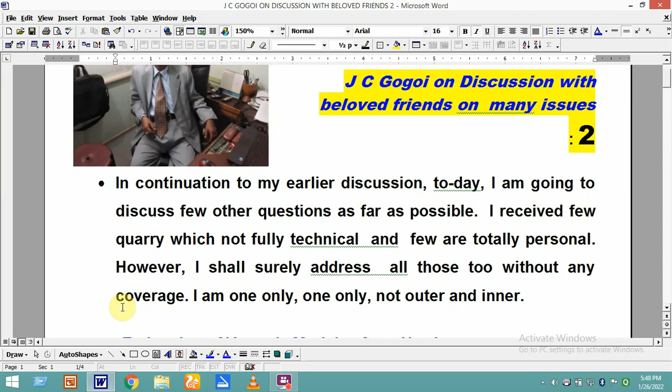Today, I want to discuss a few questions from my beloved friends. As far as possible, there are a lot of questions. I will simply reply to a few, and I shall try to address all these questions in coming days. Today I shall discuss one of my friends' questions.

He wants to know how to calculate the Young's modulus from N value. His basic problem is the formation is cohesionless soil, the granular soil, where N value, it is very difficult to collect undisturbed soil, so N value is often the only alternative for us.

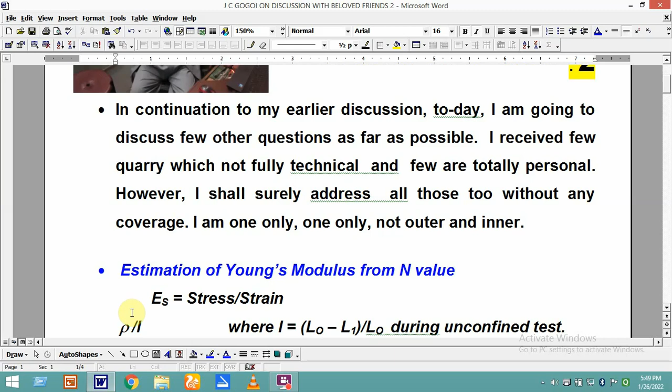We know Hooke's law: stress per strain is elastic modulus or Young's modulus. In cohesive soil, we can conduct unconfined compression test, triaxial shear test, and from there we can calculate stress and strain. Stress we can calculate from other tests also, but strain we can calculate very correctly and efficiently only from the unconfined compression test.

This is because the strain varies with the confinement of lateral pressure, that is sigma 3, where sigma 1 equals sigma 2. Some say sigma 1 and sigma 2 are the vertical stress and sigma 3 is the lateral stress. This vertical stress, sigma 1, equals sigma 2, meaning action equals opposite reaction.

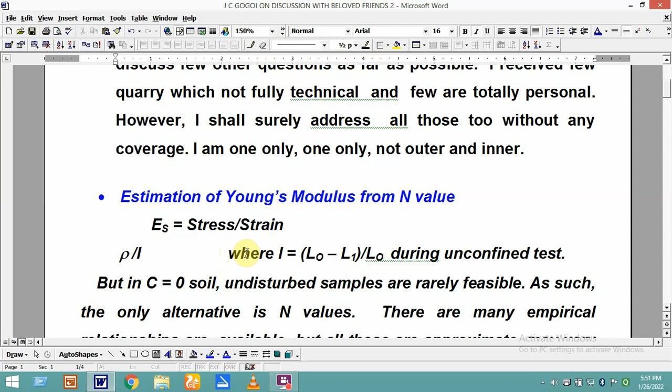So from this relationship we can calculate our stress and strain relationship. But where there are no undisturbed samples available...

...in case, very cautiously, if anyone collects one undisturbed sample from sand formation using a triple tube barrel, bottom discharge triple tube barrel, which is a too costly affair, yet there are least possibilities of conducting other shear tests from that core because it is friable in nature. Sand is friable in nature.

There are a lot of empirical relationships developed from N value also. With density also there are empirical relationships from N value, but the most popular correlation is between Young's modulus and N value, which is most commonly used.

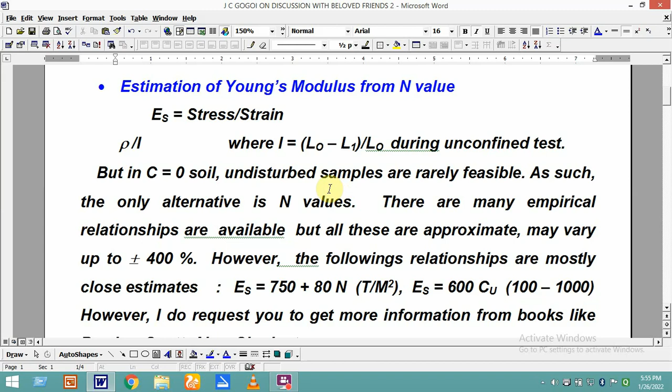In this regard, these are all empirical relationships. Some have found it, so they stated it in books or technical papers, journals. However, I sincerely request all of you to go through books like Bowles, Scott, Alam Singh, etc. We should not forget that most of these empirical relationships are based on research from developed countries, especially American countries, so their soil and our soil have some difference.

For instance, in India, one-size grain sand is available only in Madras. Otherwise, in Madras, 1mm means exactly 1mm, there will be no 1.1. It is naturally occurring sand, so it is called standard sand, Madras standard sand. For such reasons, I suggest going for more confirmation and more information from books, so that your estimation cannot be misled.

Another one of my beloved friends asked about the relationship between N value and SBC. In my earlier lecture, I had already discussed that N value is the origin of the SBC analyzing method.

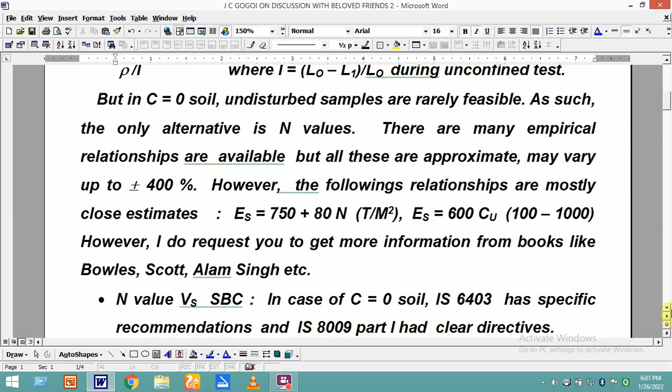We know granular soil has no cohesion because adhesive force is zero, only frictional force, so we can calculate frictional force from the N-value itself. This was recommended not only by the code but long back by Raymond and Terzaghi also. After presenting his split spoon sampler, Raymond conducted and demonstrated SBC from N-value and blows, and our IS 8009 Part 1 had clear guidelines on how to calculate SBC and settlement.

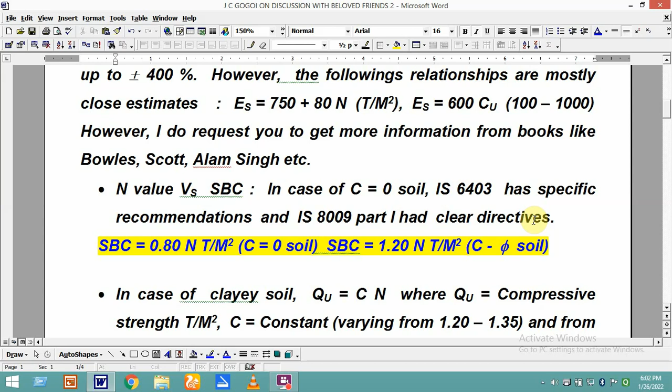In earlier days, Peck, Hansen, Thornburn and Terzaghi considered for sandy soil 0.8N in SBC tons per meter square. In case of clay, it's 1.2N tons per meter square, for both C and phi clay. So from this N-value we can calculate the frictional angle phi directly, and from there the cohesion component will be zero. Next, combining the weight and surcharge components, we can calculate the SBC.

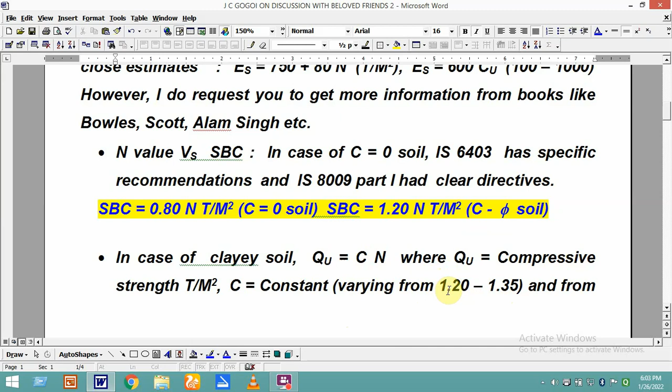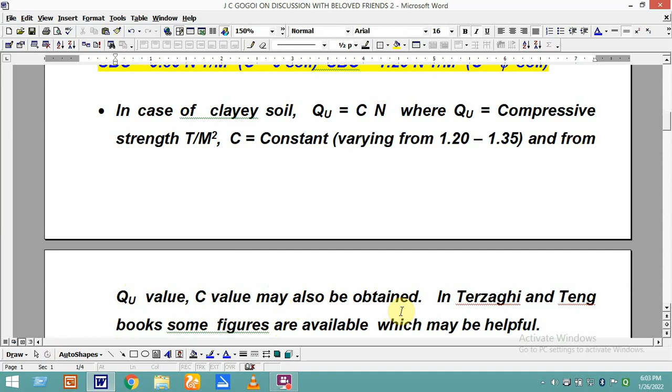In case of clay soil, normally we calculate the unconfined compressive strength from N-value, which is C times N, where C is a constant varying from 1.2 to 1.35. Earlier it was considered 1.2, now it is 1.2 to 1.35. From this compressive strength value, we can also calculate the C value, because there is an accepted theory: Q equals 2C times tan of 45 plus phi by 2.

During our shear test, this is the failure plane, and this angle is considered as beta, which equals 45 plus phi by 2. From that criteria we can calculate C also, considering phi value from 5 to 10 depending upon the liquid limit and plastic limit.

In such cases we have to calculate the C value considering phi as 5, and another C value considering phi as 10, or any value, but it should not be more than 10. We should go for SBC analysis for C and phi, for phi equal to 5 degrees against some known C, and for phi equal to 10 degrees against the corresponding C value.

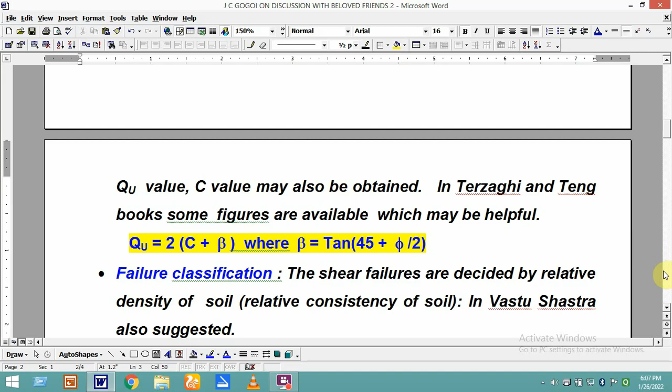this soil mechanics means relative density of the soil, color, relative density and permeability of soil. With these three aspects, they focused on construction activities. Relative density means less the void, the soil is relatively more dense. Less the permeability, the soil will be relatively more dense.

So in the line of Vastu Shastra's instructions, our modern scientists, Terzaghi and others, also calculated two methods, all based on relative density. One method is void index: if void index is less than 0.55, then general shear failure, and if it is greater than 0.75, then local shear failure.

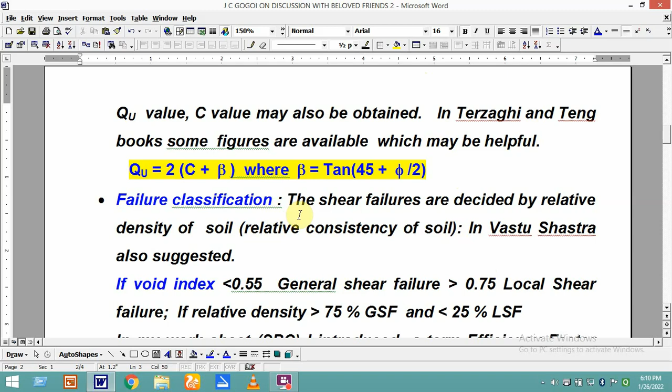In relative density terms, if it is greater than 75%, then general shear failure, and if relative density is less than 0.25, then it is local shear failure. This is clear: only relative density is the deciding criteria of the failure classification, whether general shear failure or local shear failure. General shear failure means 100%, local shear failure means 66.7%.

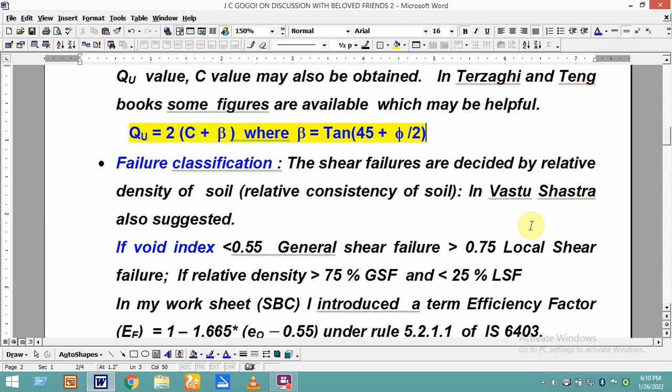So in between, that will be intermediate. In all my worksheets, I introduced a term called efficiency factor, calculated from void index. Efficiency factor EF equals 1 minus 1.665 times, within bracket, E0 minus 0.55, under rule 5.2.1.1 of IS 6403.

In terms of relative density, efficiency equals 1 minus 0.666 times, within bracket, 0.75 minus relative density by 100. That means it is not in percentage.

In this equation, you may be having one question where I am getting 1.665 and 0.666. You may be raising this question. I will explain the basic difference between general shear failure and local shear failure. General shear failure means 1, local shear failure means 0.667.

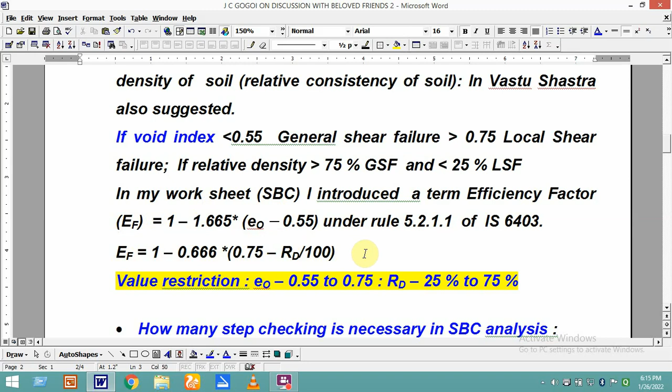I hope this will surely help you in calculation. You can use this equation directly, there is no problem. I do not have any copyright or anything else, you can use this equation directly.

Another question, perhaps from a professional engineer: how many steps of checking are necessary in the SBC analysis?

SBC means the safe bearing capacity. Our design load shall be safe against shear failure and excessive settlement failure.

The limitations of settlement for different types of structures are given, right from tall structures, steel structures, RCC structures and RCC panel structures, for different soils like sand, hard clay, soft plastic clay. There is a table in IS 1904.

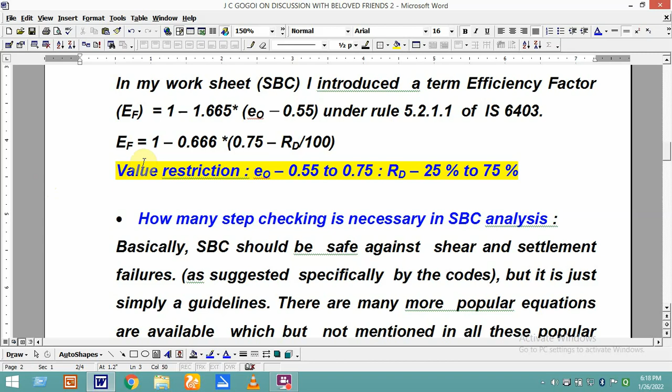These two failures are suggested by codes, but it is simply a guideline, not a bible for us, it is simply a guideline. Even most codes, except American and British codes, ASTM and British code.

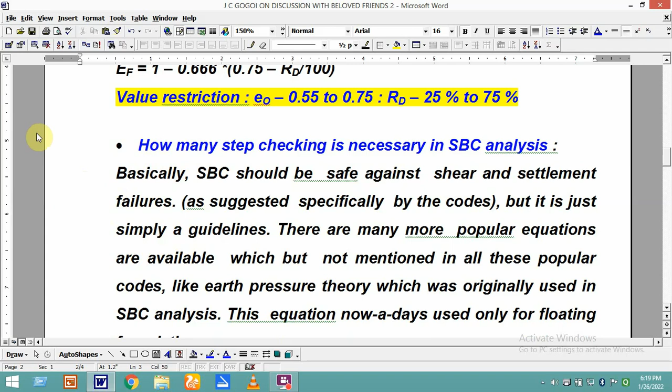Except those codes, all our Indian codes do not accommodate the original earth pressure theory introduced by Rankine. Neither was it included in our codes nor suggested by any books. Our SBC should also be based on this. This earth pressure theory nowadays is only required in foundation engineering for designing a floating foundation.

I do not know why this important equation was neglected. In my personal opinion, I feel it is more essential to estimate the SBC using a minimum of 3 methods, say one C-phi method, one SPT method,

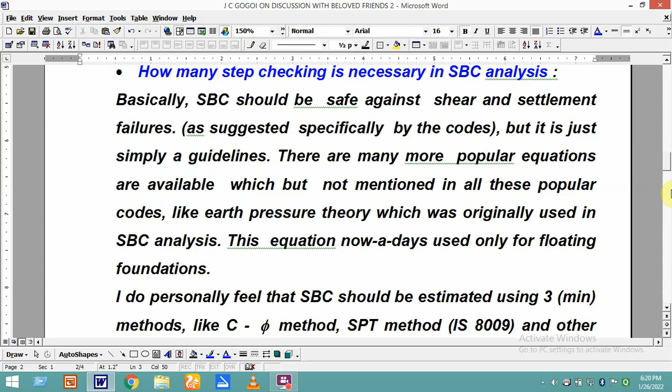and another using the many equations in our Indian Standard Code, like in IS 2911 Part 1 there is an equation for pile end bearing capacity. So pile end bearing capacity and our SBC for shallow foundation are the same.

In a pile, there are two components: one is skin resistance, another is end bearing. In that equation, the N value is there and the length is there. So instead of length, our depth of foundation is there. So we can rearrange that equation and use it for calculation of SBC.

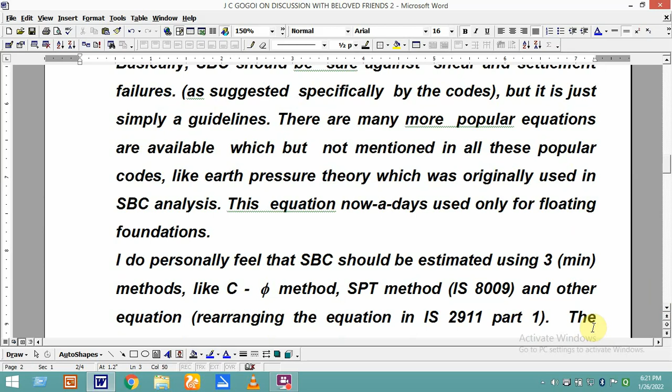And finally, select the lowest value. I am not saying that this lowest value should always be adopted. Sometimes if the input data for the lowest value is not proper, the value will unnecessarily be low.

And if we are using three methods, and one is abruptly high while one is abruptly low, that means there may be some wrong input. So we must question it and select which input is wrong. From there, we select the proper value. From the selected value, we have to go for settlement checking.

After settlement checking, if the anticipated settlement is within the limit as per IS 1904, then we have to go for earth pressure checking.

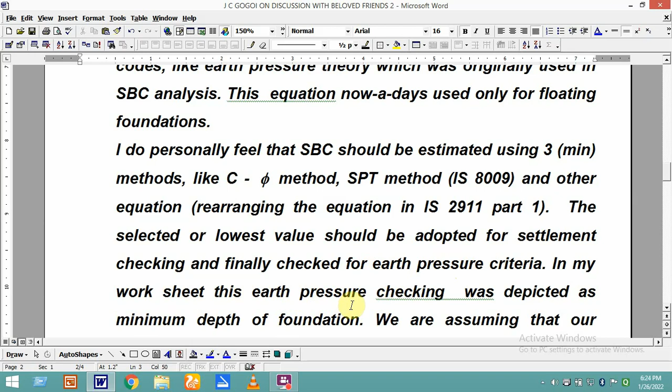Here I want to add one more thing. We are assuming that our calculated loads are full and final. But there may be some amount of accidental loads too, during earthquake, from adjacent columns, etc. During some landslide, some earth pressure will be there. There may be exceptional and accidental loads that may add up to the same loading. We do not know, so we must check for that also.

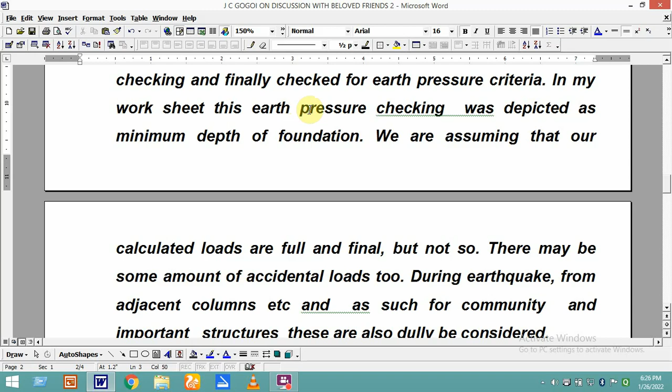In all my worksheets which are published earlier, I have already presented different steps for checking. In seismic cases, our allowable limit is 25%, so I am considering 25% higher value on one side and 25% lower value on the opposite side. What will be the resultant deflection of the foundation soil below the foundation? This checking was there. So in such cases, in my opinion, especially for important and community structures, these conditions should also be duly considered for more safety of a structure.

Another question is how to make correction of SPT value.

SPT value, actually there is one important aspect, because we all know that our soil density is generally mainly because of overburden pressure, overburden weight. The overburden weight is basically resisted by shear strength of soil and pore water pressure.

So, Raymond, after introduction of his split spoon sampler, proposed two corrections. One is overburden correction, another is dilatancy correction. Dilatancy correction means for fine grained sand and silt.

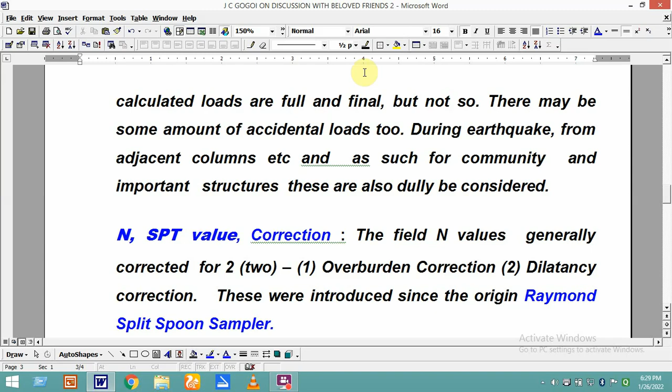If you take some silt, some amount of silt in a liquid limit device or in your hand, taking some moist silty soil in your palm and making some mark with a pencil, you hammer it very gently, you strike it, and then you see the water coming out gradually. So the same phenomenon develops during hammering. The pore water from this type of soil is quickly released and the soil becomes harder than its earlier stage. So in such cases, dilatancy correction becomes necessary.

You see, the correction in all my worksheets, what happened is I am not using any graph or any recommended figure. I am converting to equation only, so that one can easily calculate instead of reading from a figure or graph every time.

Overburden correction, NC, that means N is field N, neglecting the number of blows for the first 15 centimeters, and this N is for the second and third 15 centimeters' number of blows, and NC is the corrected N value, which we can calculate, and FC is the correction factor corresponding to overburden pressure.

This is equal to 2 divided by, within bracket, 1 plus 0.01 times P, where P is the overburden pressure in kilonewton per meter square. So with this equation we can go for overburden correction, but this value should not be less than 0.5 and should not be greater than 2. It should be between 0.5 and 2.

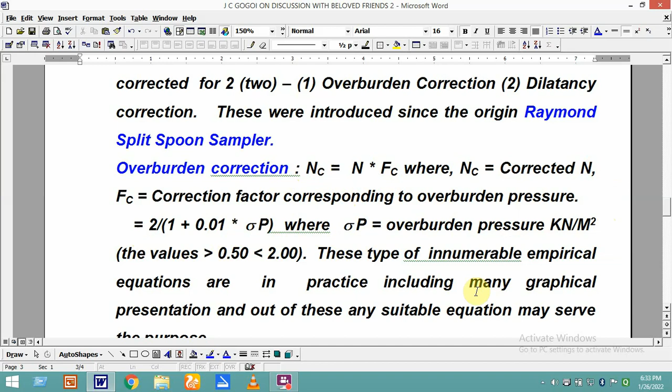Dilatancy correction is 15 plus NC minus 15 divided by 2, where NC is the corrected value. NC must be more than 15; only in case of greater than 15 is its correction necessary.

Another point: this is for a particular 30 centimeter value, but our foundations shall be much bigger than that. Whether that particular 30 centimeter value shall hold good for say a 5 meter by 5 meter foundation or not - in such cases, IS 6403 and IS 8009 have recommended some principles.

Although we are conducting the SPT test at an interval of 1.5, for this calculation purpose we have to find out the series of values for 75 centimeter intervals up to 1.5 to 2 times B, and take the average of all those values.

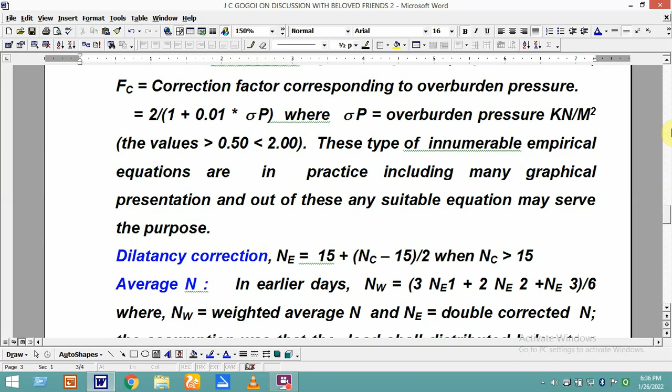So this is simple, there is no problem. However, in earlier days, it was termed as weighted average, NW.

Weighted average is 3NE1, where NE means after this correction: NE1 plus 2NE2 plus NE3, divided by 6. This means it is considered that our load shall be distributed up to 1.5B, and gradually the impact of the load on these values will be decreasing.

So the first one-third of B, this N value is more responsible, this will be 50% responsible, and this will be less responsible. Accordingly we have calculated.

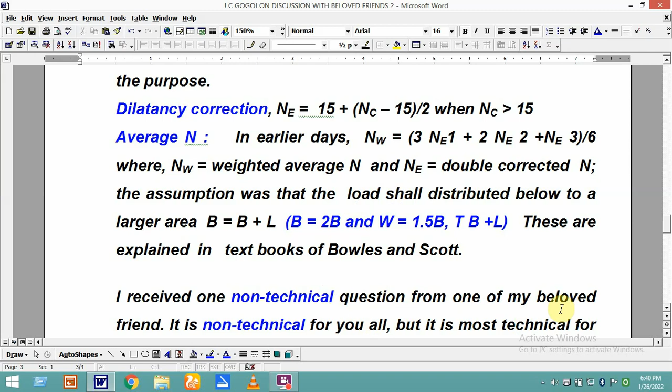I received one very lovely question from one of my beloved friends. It is a non-technical question - non-technical for you all, but most technical for me, for my life. The question is, he asked me had I been in any love affairs during my early life?

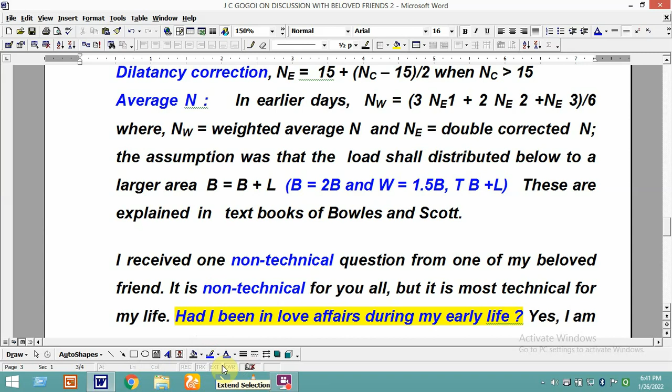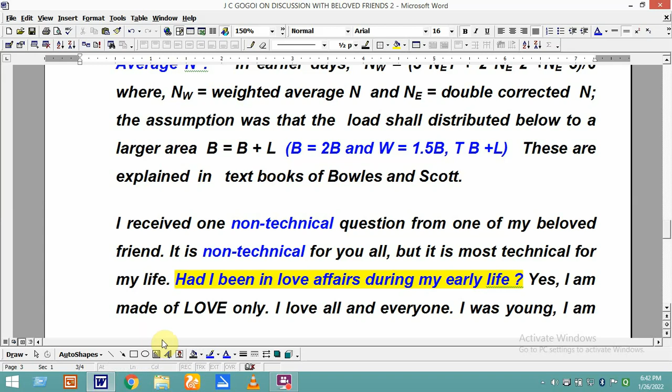First I tried to avoid this question immediately, but yes, I love all - I love you and all - because I am made of love only. Everyone says our body is made of 5 elements; I am saying my life is made of one element, that is love, L-O-V-E, love. So I love everyone. Even I love God also - I am not a God-fearing man, I love God. I love plants also, I love sky also, I love moon also, sun also - everything I love.

That gentleman already asked me, during my young age - yes, I was young. I am young, and I shall remain young always and forever. Frankly speaking, I want to add one thing.

During our days, we use friends. Friends means classmate, college mate, schoolmate, batchmate, roommate, hostel mate. These are our friends. These we do not use in our time. There was no word boyfriend, girlfriend.

Nowadays, friend is less important. The subject is less important, the adjective is more important - girlfriend, boyfriend. Friend is less important.